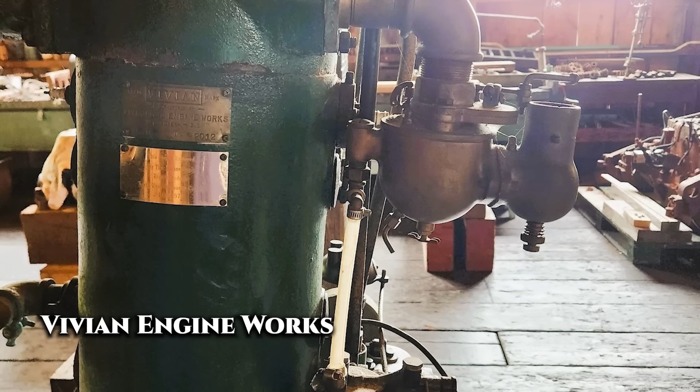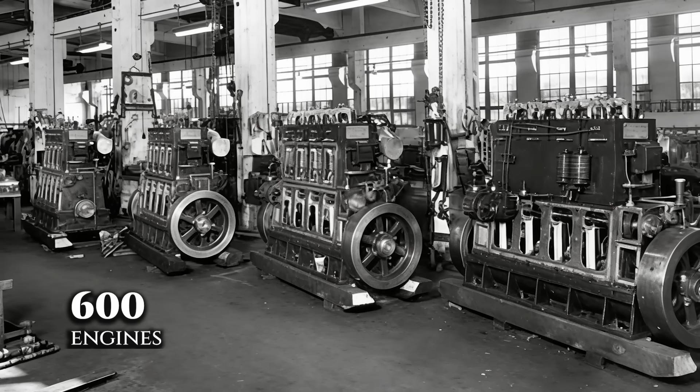Vivian Engine Works built the diesel engines that fishermen and tugboat operators on the BC coast trusted with their lives. Heavy, slow-turning machines cast in a North Vancouver foundry, designed to start in the morning and still be running when the operator's grandchildren took the wheel. Behind that trust was a company that delivered more than 600 engines to the Canadian military during the Second World War and became the dominant diesel builder of the Pacific Coast.

They survived the conversion from sail to power, survived 2 world wars, survived the American imports that pushed north when the tariff walls came down. And then, after 40 years of building in Vancouver, the company simply vanished. The name erased, the records destroyed, the factory gone. But the engines didn't stop. How does a company whose engines are still running 80 years later simply cease to exist?

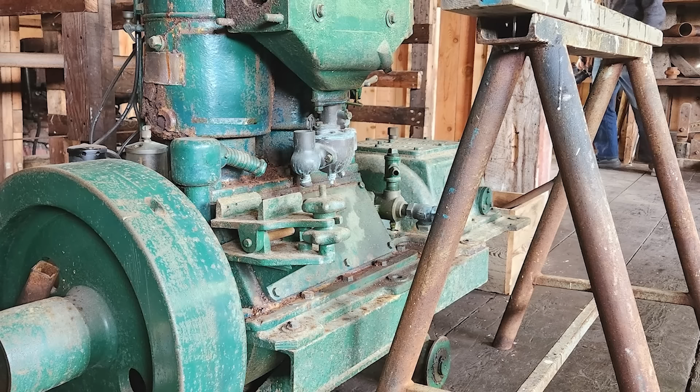What happened? Chapter 1. 60 Clementina Street. Vancouver, in 1890, was a city still rebuilding from its own ashes. 4 years earlier, a land-clearing fire had jumped the line and consumed everything west of Cambie Street in 45 minutes, the entire town, gone before the afternoon was out. What rose in its place was raw and restless.

Roughly 13,000 people crowded onto a narrow spit of land between Burrard Inlet and False Creek, hemmed in by timber so thick you could walk 50 miles north without seeing sky. Sawmills lined the inlet shore, their blades screaming through Douglas fir logs that had taken 3 centuries to grow and 20 minutes to fall. Steam tugs hauled log booms through water brown with bark and sawdust.

To the south, the salmon canneries of Steveston were pulling millions of fish a year out of the Fraser River, packing them into tins stamped with names like Sockeye and Imperial, and shipping them to tables in London and Toronto. This was not a refined city. It was an industrial frontier dressed in rain, and every wheel in it turned on imported iron.

Will Vivian was born into this place on the 14th of May, 1890. His city was young enough to remember its own creation. British Columbia had joined Confederation only 19 years earlier, on the promise of a transcontinental railway that didn't arrive until 1886, the same year the fire took the town. But Vancouver was growing at a pace that startled even the boosters. Between the Great Fire and Vivian's first birthday, the population had climbed from barely 1,000 to roughly 14,000. People pouring in by rail and by steamer, drawn by the lumber trade and the promise of a Pacific gateway.

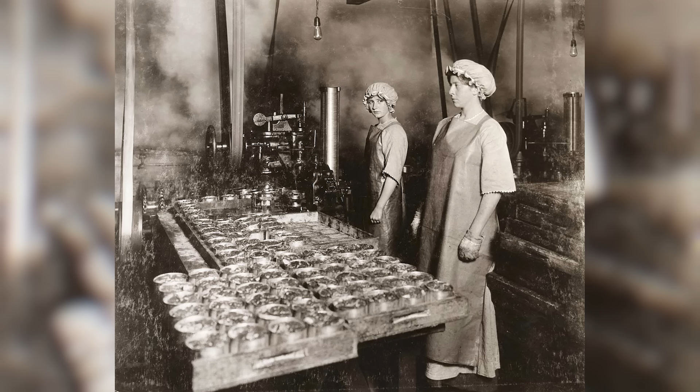The gillnet boats of the Fraser and the Skeena were still powered by sail and oar when Vivian was a boy. Japanese-Canadian fishermen, Norwegians, Croatians, First Nations families who'd worked these waters for thousands of years. They hauled their catches by muscle and wind, the same way their fathers had. The canneries didn't care how the fish arrived, only that it arrived fresh.

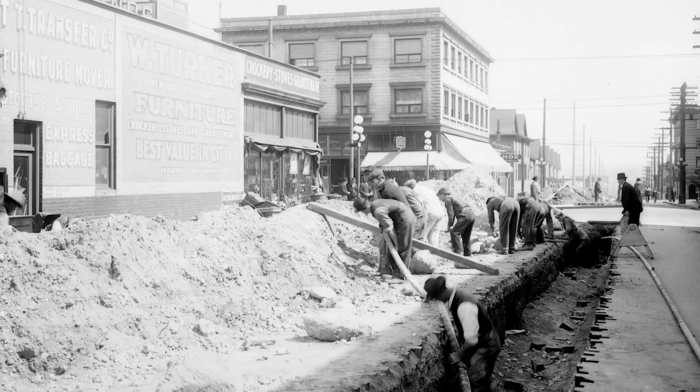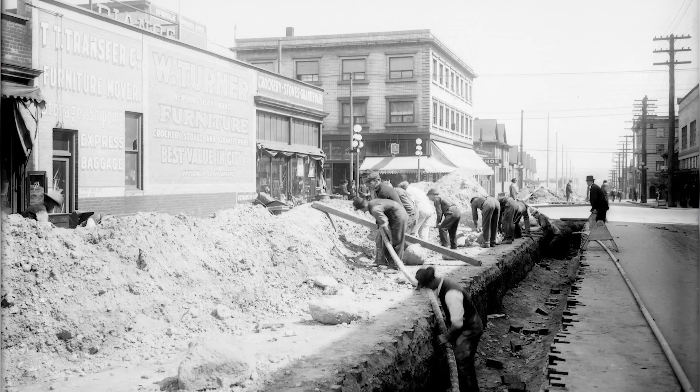But down the American coast, in the machine shops of San Francisco and Oakland, something was shifting. Small, rugged gasoline engines, 1-cylinder, 4-cycle, slow-turning, were being built that could push a 20-foot fishing boat against the current without a crew breaking their backs at the oars. The internal combustion engine was coming to the Pacific, and the men who could build them would own the coast. Vivian went looking for that knowledge.

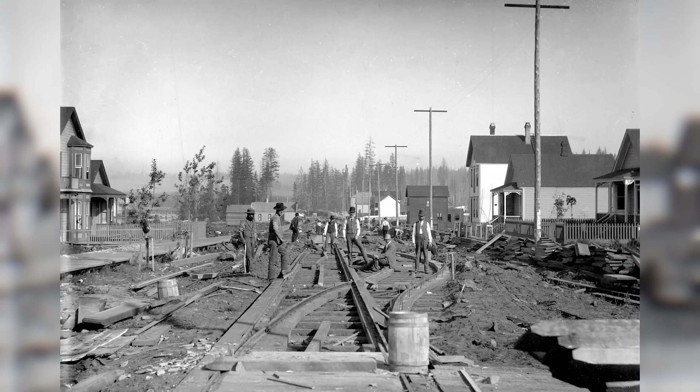As a teenager, he left Vancouver and headed south to San Francisco, to the Imperial Gas Engine Company at 60 Clementina Street, a low brick building in the industrial block south of Market Street, one of the key workshops in the West Coast's emerging engine trade. San Francisco in those years was the machine shop capital of the Pacific, the place where mining equipment, marine engines, and agricultural machinery were designed, cast, and shipped to every port from Puget Sound to Valparaiso.

A young man with steady hands could walk from shop to shop along the numbered streets south of the slot and learn a different discipline in each one: foundry work, pattern making, machining, assembly. At Imperial, Vivian learned the American School of Engine Building from the castings up. Heavy, slow, reliable. 4-cycle, long-stroke, thick-walled cylinders designed to run for years without complaint.

The philosophy was brutally simple. An engine that lasted decades beat an engine that turned fast. Speed was for racing boats and show-offs. The Pacific was no place for either.

Vivian absorbed this conviction the way you absorb a religion in your youth, completely, permanently, and with a certainty that no subsequent evidence would shake. He had no way of knowing, working at his lathe on Clementina Street, that Imperial Gas Engine Co. would one day merge and evolve into Atlas Imperial Diesel Engine Co., the very firm that would become his chief competitor on the Pacific Coast. The master's shop would produce its own rival.

In 1909, 19 years old and back in Vancouver, he founded the Vivian Engine Works. He started where every Pacific Coast engine builder started, with small 1- and 2-cylinder gasoline engines for fish boats, the one-lungers, that were transforming the gillnet fleet from sail to power, one boat at a time. The market was simple and immediate. A fisherman would walk into the shop with cash from the previous season's catch, describe his boat and his waters, and walk out with a delivery date.

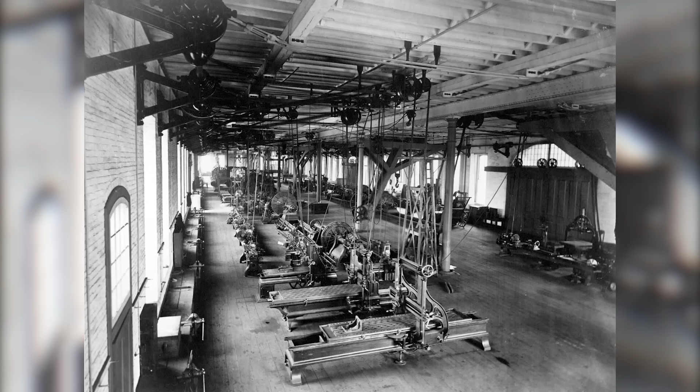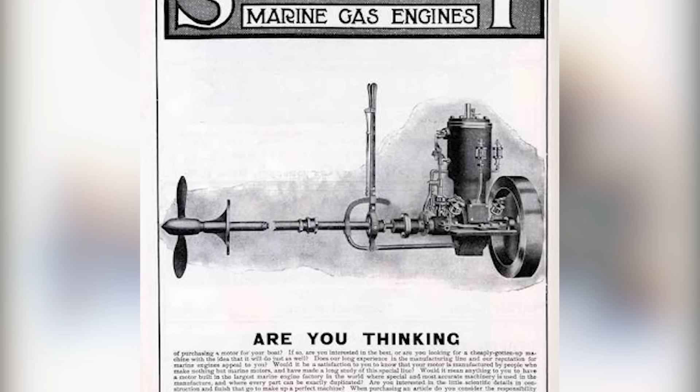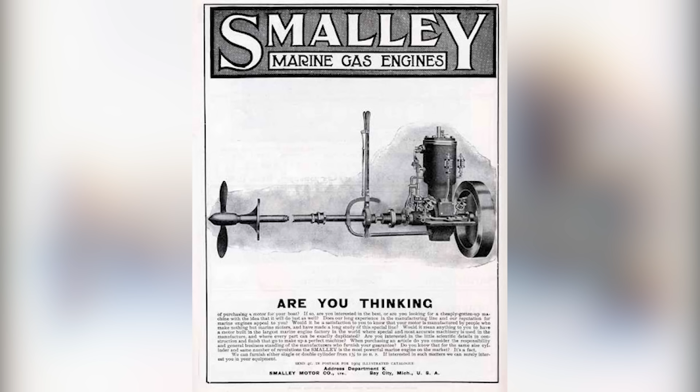What gave him his foothold wasn't genius alone. It was geography. The Rocky Mountains cut British Columbia off from eastern Canadian engine makers as completely as an ocean. American engines faced a steep tariff wall that had been raised again after 1907. A tugboat skipper on the BC coast whose engine failed couldn't telephone Hamilton or Detroit and expect a replacement before the season ended. He needed someone local, someone who cast the block in Vancouver, machined it in Vancouver, and could fix it in Vancouver when the salt water and the hours finally wore something down.

The continent didn't offer Vivian a choice. It offered him a captive market, if he had the skill to fill it. He did. And the company he built from that skill: one man, one shop, one conviction about how an engine should be made, would grow into something that powered an entire coast.

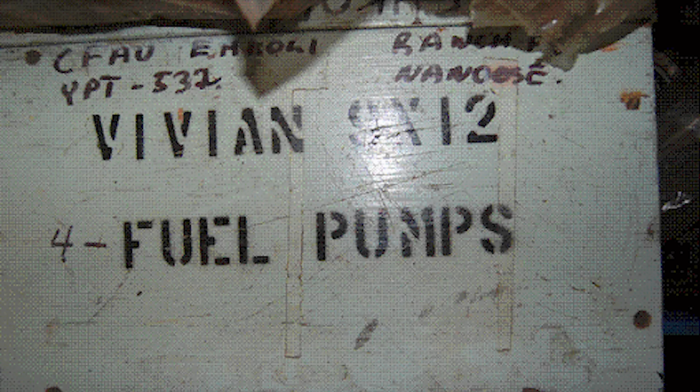Chapter 2. The First Canadian Diesel. Through the 1910s, Vivian's shop grew with the fleet it served. Every season brought more orders as the last sailing gillnetters converted to power, and the tugboat operators on Burrard Inlet discovered that a Vivian one-lunger could haul a log boom through a cross-current that would have stalled a lighter machine.

The customers weren't gentlemen yachtsmen. They were Japanese-Canadian families running seiners out of Steveston, where the smell of salmon and salt hung in the air from April to October. Norwegian trollers who'd come to the BC coast because the fishing reminded them of home: cold water, big timber, long days. Croatian gillnetters on the Skeena who worked in crews and shared the season's take. First Nations fishermen whose relationship with the salmon predated European settlement by millennia. These were the people who kept Vivian's shop running. Men who judged an engine not by its catalog specifications, but by whether it brought them home. They didn't want sophistication. They wanted iron they could trust.

But gasoline had a problem that every wooden-hulled operator understood in his bones. Gasoline vapor is heavier than air. It sinks. It pools in the bilge of a fishing boat like an invisible lake, and one spark, from a loose wire, a backfiring cylinder, a dropped wrench striking steel, turns a wooden hull into a funeral pyre in the middle of the strait. The Pacific Coast's fishing fleet was built almost entirely of wood, and gasoline killed boats and crews with a regularity that doesn't appear in most histories, because the losses were too small, too scattered, and too ordinary to make the papers. A fisherman lost off Haida Gwaii, a tugboat gone in Johnstone Strait. The sea took them, and the newspapers didn't notice.

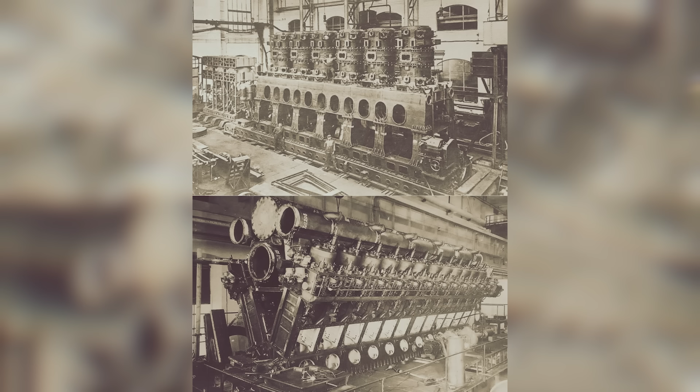And diesel engines, properly built, could run at a lower RPM for longer hours with less wear, which meant fewer breakdowns in open water, fewer seasons lost to repairs, fewer widows made by machinery that failed at the wrong moment. The diesel engine had been proving itself in European marine service since the early 1900s, but on the Pacific coast, it remained exotic, oversized, and foreign.

Eastern Canadian manufacturers hadn't built one small enough for a coastal workboat. American builders were only beginning to experiment with marine applications. The field was wide open. In the 1920s, Vivian stepped into it. He became, by the authoritative account of the Encyclopedia of British Columbia, the first Canadian company to build a marine diesel engine. It was the defining act of his career, the pivot from a competent local gas engine shop to something genuinely pioneering.

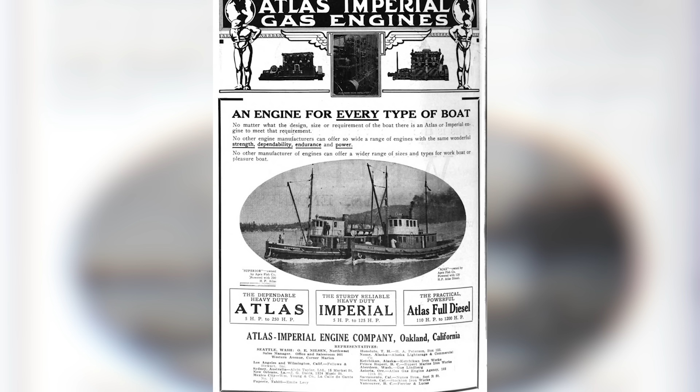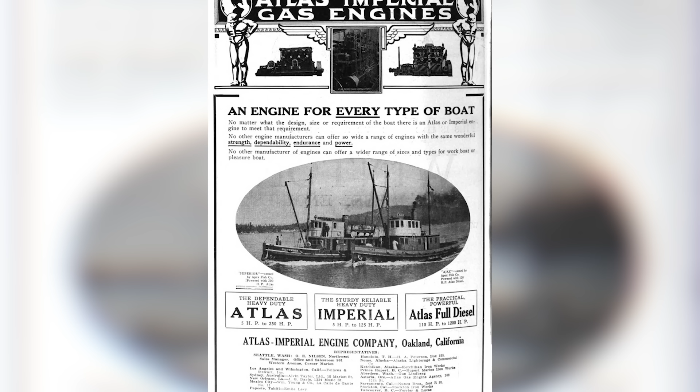And the engine he designed carried every conviction he'd formed at 60 Clementina Street and refined on the water over 15 years of building for the BC fleet. 4-cycle, slow-turning, long-stroke, with a fully enclosed crankcase from the outset. That last detail separated Vivian from his nearest competitor in a way that the operators noticed immediately. The Atlas Imperial diesels coming up from California, built, as it happened, by the successor company to the very Imperial Gas Engine Co., where Vivian had trained as a teenager on Clementina Street, ran with open crankcases.

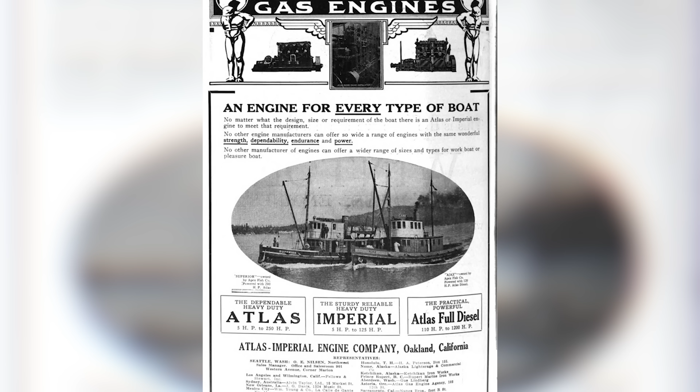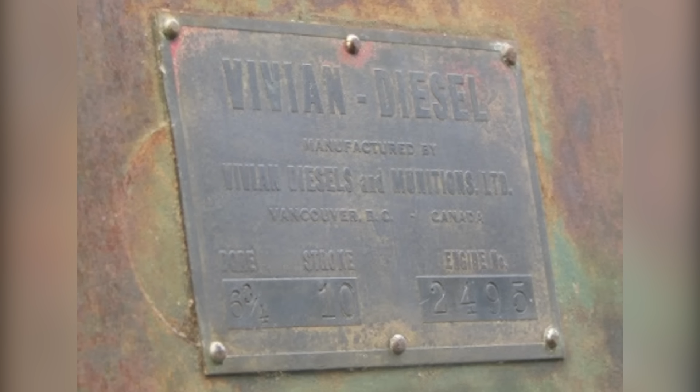It was an irony that Vivian must have appreciated. His own school, the place that had taught him to build heavy, had produced a competitor whose design he considered fundamentally flawed. Open crankcases meant oil mist hanging in the engine room, dirt grinding into the bearings, and constant maintenance in the wet, salt-heavy conditions of the BC coast. Vivian enclosed his. He built heavy castings with thick walls. He kept the RPM low and the displacement large. The result was an engine that turned slowly, burned fuel with a parsimony that operators talked about for decades, and simply would not stop running.

The market was enormous, and it was growing every season. Burrard Inlet's tugboat fleet expanded as the coastal logging industry pushed north, from Howe Sound to Knight Inlet, up the Inside Passage toward Haida Gwaii, into waters so remote that a breakdown meant days of waiting for a tow that might not come. The BC Forest Service was building a patrol fleet to police the coast's timber wealth, boats that ran hard and ran far and couldn't afford engine trouble in a gale off Cape Scott. Small coastal freighters connected communities that had no road access and wouldn't see a highway for a generation or more.

And the fishing fleet, Japanese-Canadian seiners, Norwegian trollers, the gillnet boats of the Fraser and the Skeena, was reaching farther every season, chasing salmon runs that took them hundreds of miles from home port into waters where the nearest mechanic was your own two hands. Every one of those vessels needed an engine that could run all day, burn cheap fuel, take salt water in its stride, and survive the Pacific without complaining about it. Vivian's diesel became the standard answer.

The product line expanded from those early one-lungers into a range that would eventually run from small 3-cylinder marines up to a 10-cylinder, 9-inch bore by 12-inch stroke behemoth, rated at 500 horsepower. An engine so large it was used not for boats, but for generator sets powering mining camps and remote settlements that would never see a hydro line.

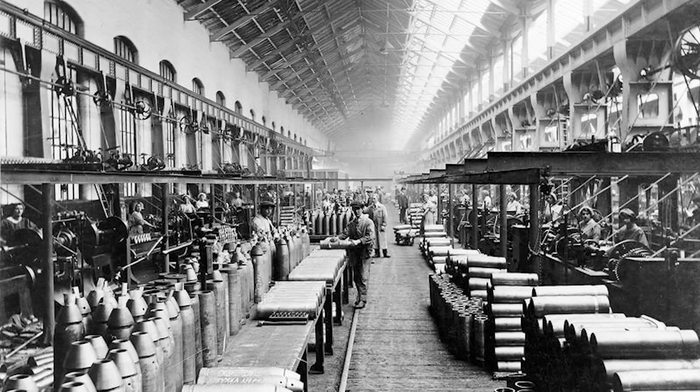Chapter 3. Diesels and Munitions. By the late 1930s, the company had outgrown its original Vancouver shop. A second plant opened in North Vancouver, larger, better equipped, built on the waterfront where finished engines could be craned directly into the hulls waiting below. Young machinists like Frank Outram, who'd already put in time at Boeing's Sea Island facility and the Vancouver shipyard, found their way to Vivian's floor, drawn by steady work and a company that hadn't laid anyone off in a decade.

The smell of that shop would have been familiar to any machinist on the Pacific coast. Hot oil, iron filings, the sharp bite of cutting fluid on steel. But the scale was new. The Vivian Works in North Vancouver wasn't a backyard engine shop anymore. It was a factory, and the engines coming off its floor were going into vessels that worked every navigable mile of the BC coast.

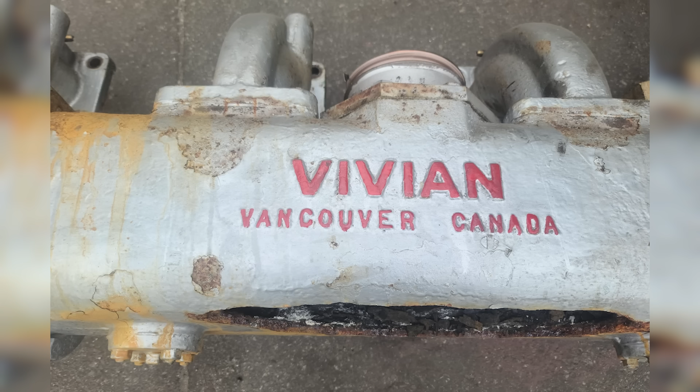The product range told the story of the company's ambition. Marine engines ran to 8 cylinders, 320 horsepower naturally aspirated, 400 with a supercharger. Generator sets climbed higher still, to that flagship 10-cylinder unit that could electrify a mining camp or power a gold dredge in the Yukon. The bore and stroke numbers were stamped onto bronze builder's plates that were bolted to each engine block like a signature.

9-12. Vivian Diesel, Vivian Diesels and Munitions Ltd., Vancouver, BC, Canada.

Those plates were cast to last as long as the engines themselves. Decades later, long after the company that made them had ceased to exist, they'd surface in maritime antique dealers as far away as Maine. Small bronze rectangles that nobody under 60 could place, testifying to a firm that most Canadians had never heard of. When the war came, Vivian was ready.

The company adopted a dual identity that appeared on everything from letterhead to the annual company picnic photograph. Vivian Engine Works Ltd. for the commercial side, Vivian Diesels and Munitions Ltd. for the military contracts. The distinction mattered. It meant the plant was now producing not only engines, but munitions, though the specific ordnance has never been documented in public records. What has been documented, in David Kahn's authoritative account, is the engine output.

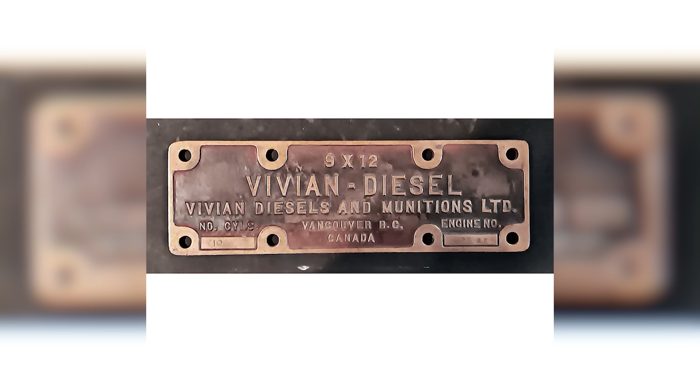More than 600 engines for the Canadian military during the Second World War. 600 engines from a single West Coast plant. Consider what that number meant in the context of a factory that had started, 30 years earlier, as one man casting one-lungers in a Vancouver shop.

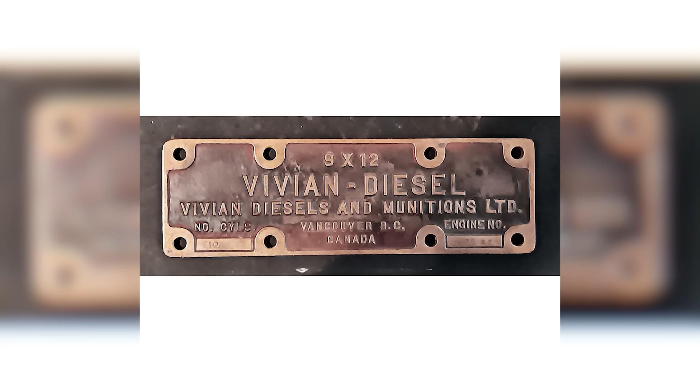A Vivian Marine Diesel was not an assembly line product stamped out in minutes. It was a multi-ton assembly of cast iron, machined steel, and precision-fitted components. The block poured in the foundry, the cylinders bored on heavy lathes, the crankshaft ground to tolerances measured in thousandths of an inch, each bearing surface hand-scraped by machinists who could feel a high spot through their fingertips.

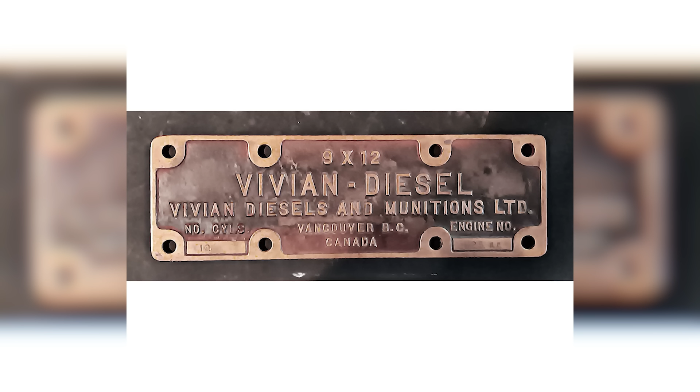Every engine was built to naval specification, inspected and certified before it shipped east by rail to the builders' yards in Ontario. The tonnage of iron that left the North Vancouver waterfront between 1939 and 1945 was staggering. 600 engines, each weighing several tons, crated and loaded onto flat cars bound for Owen Sound and Kingston. And every one of those engines carried the same DNA that Vivian had brought back from San Francisco as a teenager. Heavy, slow, enclosed, designed to run until the hull around it rotted away.

The signature wartime contract was the Royal Canadian Navy's Glen-class tugboat program. These were steel-hulled tugs designed for harbor duty, convoy escort towing, and the heavy salvage work that a wartime Navy generates in punishing volume, pulling damaged vessels off sandbars, towing crippled freighters into port, clearing harbor debris after U-boat attacks on convoy anchorages.

The Glen program split into 2 designs. The shorthouse variant received American engines, 6-cylinder units from Enterprise Engine and Foundry, built in San Francisco. The longhouse variant, the larger, heavier design, the one that would handle the roughest work, received Vivians. 8-cylinder diesels, 320 horsepower, Canadian-built for Canadian hulls.

11 longhouse Glens came out of Russell Brothers Shipyard in Owen Sound, Ontario. The Glenada, the Glendower, the Glenora, the Glenmont, the Glenlea, and 6 more whose names would scatter across Canadian naval history like seeds. Another 5 were built by Canadian Dredge and Dock in Kingston. Every single one of them carried a Vivian at its heart. 8 cylinders of Vancouver iron, turning at the slow, heavy cadence that Vivian had spent 3 decades perfecting.

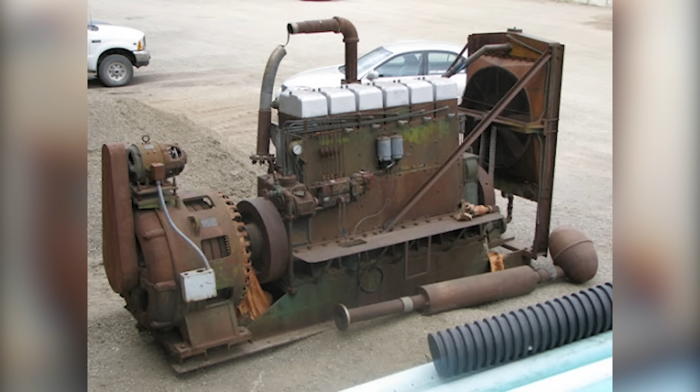Mining camps across the BC interior ran on Vivian power. Remote coastal settlements that would never see a hydro line depended on Vivian generators for their lights, their radios, their link to the outside world. The wartime engine contracts were the headline, but the generator business told an equally revealing story. Vivian iron was woven into the infrastructure of the Canadian North in ways that no other Pacific Coast manufacturer could match.

The company's ambition showed in civilian ventures, too. In 1939, just before the war shut down everything that wasn't military, Will Vivian had commissioned George Askew, a boat builder working out of Marpole on the Fraser River's North Arm, to construct a personal demonstrator vessel. The boat was large enough and seaworthy enough to carry an 8-ton Vivian diesel across the Pacific to Australia on a promotional voyage that would announce Vivian engines to the world beyond British Columbia. He named her the Leola Vivian.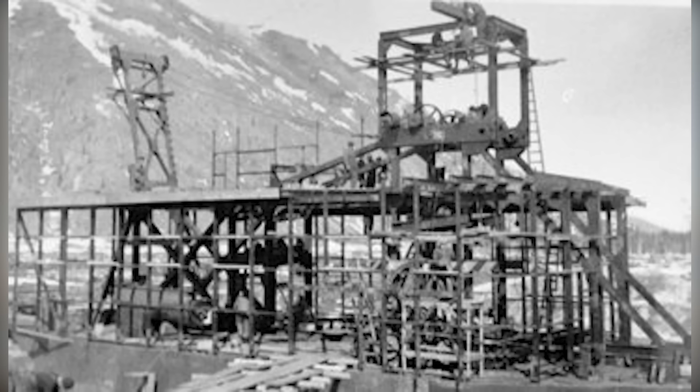The Australian voyage never happened. The war redirected every shipyard and every diesel engine on the coast to military service, but the boat survived. Renamed the Oliver Clark II, she spent the next 8 decades working the BC coast, passing through different owners and different names. Her Vivian eventually replaced by a newer engine, but her hull still sound. In 2013, at 74 years old, she was still afloat. At 86, she still is.

At the PNE, Vancouver's Pacific National Exhibition, the city's annual fair, Vivian diesels took exhibition space on the trade floor, displaying engines with the quiet confidence of a company that knew it had no equal on the coast. Steffens Colmer Studios photographed the booth. The image survives in the City of Vancouver archives, a record of a moment when the company's name meant something that didn't need explaining to anyone who worked the water.

And then the war ended. 600 engines shipped, 16 Glen-class tugs running on Vivian power, a product line that stretched from 3-cylinder fishboat engines to 500 horsepower industrial generators. A workforce that had proven it could deliver military quality at military pace from a single plant on the North Vancouver waterfront. Will Vivian, now in his mid-50s, stood at the head of something remarkable. A company built from nothing by a Vancouver-born machinist, trained in San Francisco, who'd returned home and powered an entire coast.

The annual company picnics, captured in a 1944 photograph now held in the City of Vancouver archives, showed a workforce large enough to fill a park. Men and women, machinists and office staff, gathered under both company names, as if the peacetime and wartime identities were simply two faces of the same conviction.

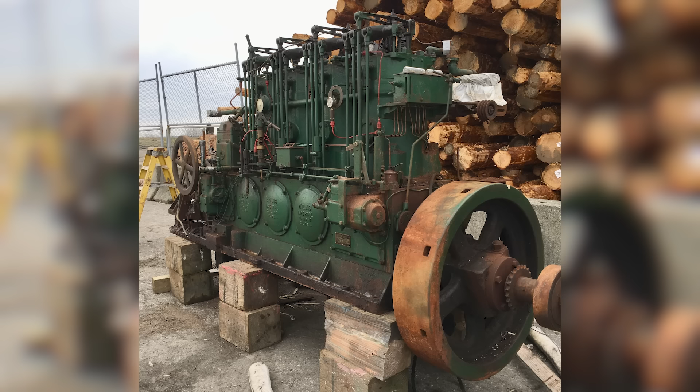Chapter 4. The Summit. Before the cliff. By 1948, Will Vivian was 58 years old, and the man and the company were almost indistinguishable. His engineering convictions hadn't softened with age. If anything, they'd calcified into something closer to doctrine. David Kahn's assessment, drawn from interviews with people who'd known Vivian and worked alongside him, is measured but unmistakable. Vivian resisted the move to light and compact diesel engines, which were easier to install and service, and were produced using mass production methods and more modern metals technology.

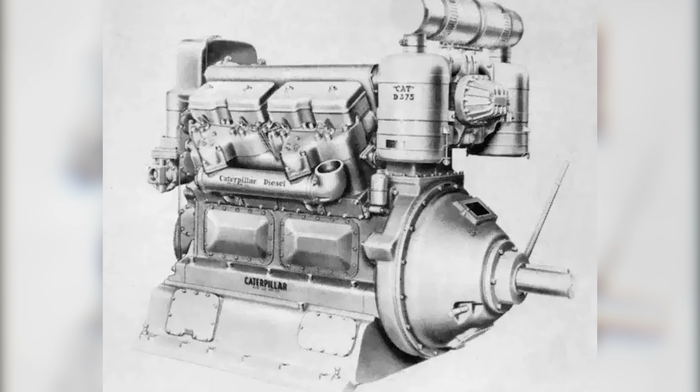He'd refused, on principle, to build locomotive engines when the opportunity was offered to him, a market that could have diversified the company and cushioned it against any downturn in the marine trade. He wasn't interested. He built marine diesels. He built them heavy. He built them to last. He'd been right about that for 40 years. He intended to go on being right. The problem was that the rest of the diesel world had stopped agreeing with him.

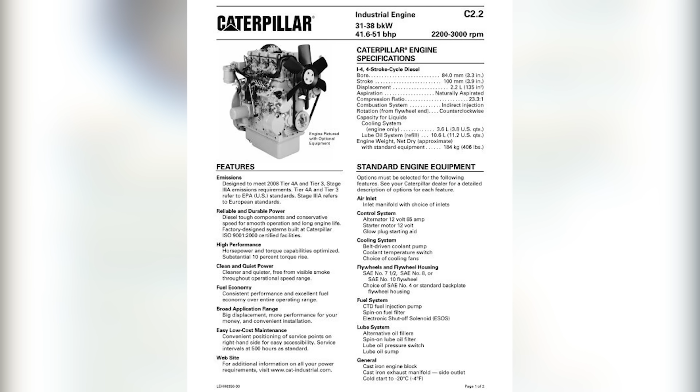Caterpillar, Detroit Diesel, Cummins. The American giants were pouring wartime engineering advances into high-speed, lightweight engines that could deliver comparable horsepower from a fraction of the weight and volume. Better metallurgy, tighter tolerances, higher RPMs, made reliable by alloys and manufacturing techniques that hadn't existed when Vivian learned his trade at 60 Clementina Street. A Caterpillar marine diesel could be installed in half the time, serviced by a dealer network that stretched from Seattle to Juneau, and replaced without rebuilding the engine room around it.

It couldn't match a Vivian for raw longevity or fuel economy, not even close, as the decades ahead would prove beyond any argument. But it was lighter, cheaper to purchase, and available now. For the operators who ran a single boat and counted every dollar against the next season's catch, that calculation was beginning to shift. A Vivian 8-cylinder weighed tons more than a Caterpillar of comparable horsepower. Tons that displaced fuel capacity.

Tons that ate into a hull's carrying ability. Tons that meant a heavier, deeper, more expensive boat to begin with. For the tugboat companies watching their competitors refit with lighter American iron, the pressure was commercial and immediate.

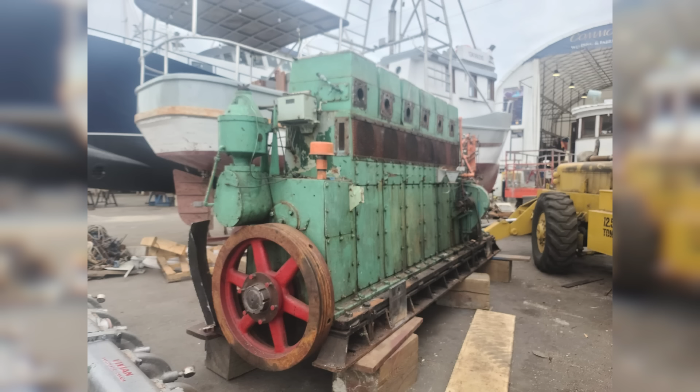And for Will Vivian, standing in his North Vancouver plant surrounded by engines that would still be running on the BC coast 80 years later, the tide was turning in a direction his engineering philosophy couldn't follow, and his temperament wouldn't accommodate. He was right about the engines. History would settle that question beyond any dispute.

Vivian diesels are still turning on the BC coast today, 8 decades on, long after the Caterpillars and Detroits that replaced them have been scrapped, recycled, and forgotten. But being right about the engines and being right about the market are two different kinds of right, and the second is the one that keeps a company alive.

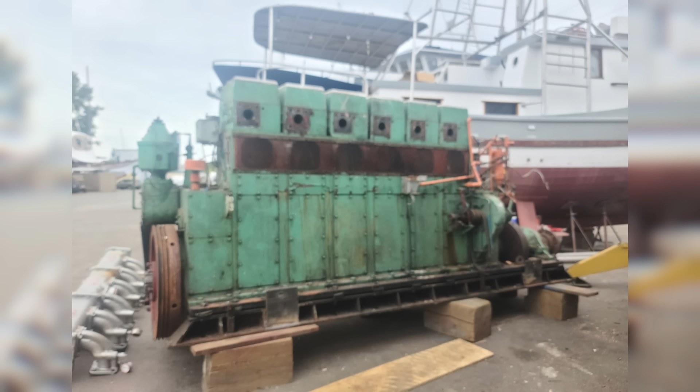In 1949, Will Vivian, 59 years old, the dominant engine builder on the Canadian Pacific Coast, a man whose conviction in heavy iron had never once been proven wrong, made the decision that would determine not just his company's future, but the fate of everything he'd ever built. He sold. Chapter 5. The Men from Loughborough.

Will Vivian sold his interest in the company in 1949. He was 59 years old. He'd built the first Canadian marine diesel engine, powered the BC coast for 3 decades, delivered 600 engines to the Canadian military, and earned a reputation among Pacific Coast operators that no amount of advertising could have purchased.

The man whom David Kahn called the Henry Ford of the Canadian diesel industry signed his life's work over to a group of men from the English Midlands who had never set foot on a tugboat in Johnstone Strait and whose understanding of the Pacific Coast diesel market could have fit on the back of a builder's plate.

The buyer was the Brush ABOE Group, based in Loughborough, Leicestershire, an industrial combine assembled over the previous decade by a man named Alan Paul Good. Good had served as deputy chairman of Brush Electrical Engineering from 1939 and managing director from 1941, and he'd spent the post-war years building something that looked, on paper, like a rational solution to the fragmented state of the British diesel industry. Through the late 1940s, he'd been buying engine companies with the systematic thoroughness of a man following a plan.

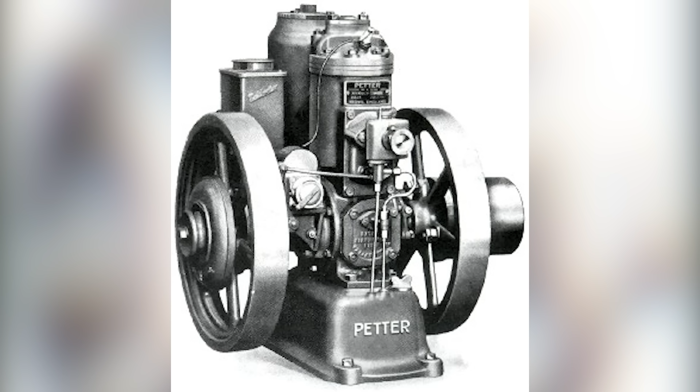Petter of Staines, acquired in 1937 before the war. Mirrlees, Bickerton and Day of Stockport, acquired in 1948. J. and H. McLaren of Leeds, the same year. Henry Meadows of Wolverhampton, alongside them. The ABOE in the group name stood for Associated British Oil Engines.

It was a roll-up strategy. Consolidate every significant British diesel builder under one roof, then rationalize production across the portfolio. Large engines to Mirrlees at Stockport, medium engines to McLaren at Leeds, small engines to Petter at Staines. Each plant would do one thing, efficiently, without duplicating what the sister plants were already doing. It was rational. It was orderly.

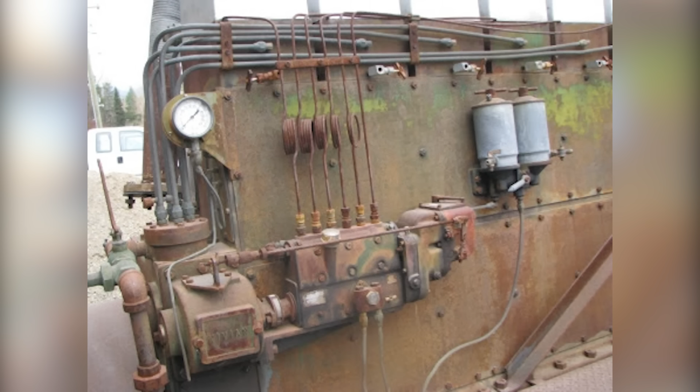And it was entirely British in its assumptions, the assumptions of a small, dense country where factories sat within a few hours' rail of each other, and a single parent company could coordinate production across a handful of Midlands and northern towns as easily as a shopkeeper rearranging goods on adjacent shelves.

Vivian Diesels and Munitions Limited was folded into this structure in 1950, the formal corporate consolidation completing a deal that Will Vivian had agreed to the year before. The same tranche brought in National Gas and Oil Engine Company of Ashton-under-Lyne and Hopkinson Electric Company.

On paper, the Vancouver operation was now part of a British diesel empire that stretched from Loughborough to Leeds, to Stockport, to Staines, to Vancouver. On the water, 4,000 miles from the nearest sister plant, nothing about that sentence made any sense at all.

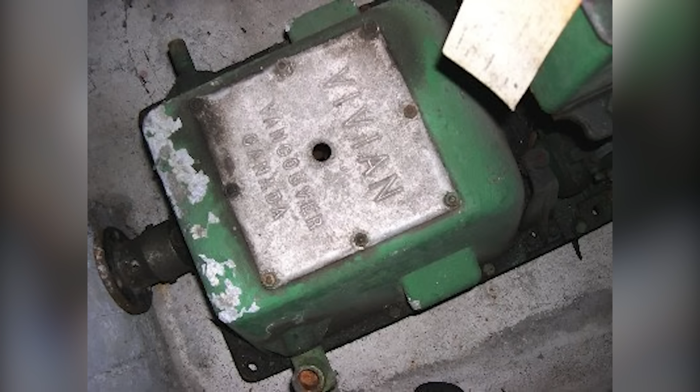The machinists on the North Vancouver floor, men like Frank Outram, who'd chosen Vivian over Boeing and the shipyard because Vivian built things that lasted, woke up one morning to discover that their employer was no longer a Vancouver company, run by a Vancouver man who walked the floor and knew every casting by its number.

Their employer was now a British conglomerate headquartered in the East Midlands, managed by executives who were rationalizing engine factories the way a rail dispatcher reroutes freight, by capacity, by category, by the logic of a system that had been designed for a country that could be crossed in a day.

Why Vivian sold is a question the surviving record can answer only in part, because the records that would have settled it completely were destroyed a quarter-century later.

Kahn's account stresses the competitive pressures that were closing in from every direction. The American high-speed diesels from Caterpillar and Detroit Diesel and Cummins that Vivian had refused to build. The post-war shift toward lighter, mass-produced engines that could be installed and serviced by a wider network of mechanics. The rising cost of maintaining a heavy casting, low-volume, hand-finished production line against companies that could stamp out a marine engine in a fraction of the time and sell it for a fraction of the price.

The tariff wall that had protected BC manufacturers was lower than it had been. The American dealer networks were pushing north. The market that had once been captive, held in place by geography and trade policy, was opening, and the engines coming through that opening were everything Vivian's were not: light, fast, cheap, and disposable. Vivian's own engineering philosophy, the quality that had made his engines supreme, had become the quality that made his company most vulnerable to exactly this kind of pressure.

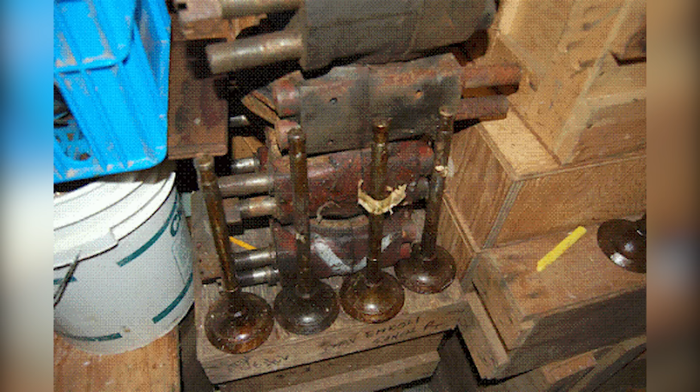He wouldn't build light. He wouldn't build fast. He wouldn't diversify into locomotive engines or industrial applications beyond generator sets. He was a marine diesel man, and he built marine diesels the way he'd been taught at 60 Clementina Street 40 years earlier: heavy and slow and built to last forever. And by 1949, the question wasn't whether the world still needed heavy, slow-turning diesels. The engines themselves would answer that question for the next 8 decades. The question was whether a single independent works in North Vancouver could go on building them while the giants scaled and the conglomerates consolidated. The answer, apparently, was no.

Will Vivian took the British money and stepped away from the company he'd founded at 19. He would live another 16 years, dying in 1965 at 75. Whether he walked away in relief or in defeat, in quiet resignation, or in the private certainty that his engines would outlast whatever the men from Loughborough did to his company, nobody now alive can say. What the record does show is that from the moment the papers were signed, the decisions about what happened on the North Vancouver shop floor were no longer made by someone who knew the coast.

Chapter 6. The Wrong Engines for the Wrong Coast. The logic of the Brush ABOE group was specialization. Each plant would build one class of engine, and the group would cover the full range of the British and Commonwealth diesel market from a coordinated portfolio. Large, slow-speed diesels went to Mirrlees at Stockport. Medium-speed units went to McLaren at Leeds. Small high-speed engines went to Petter at Staines. Every factory had its assigned lane, every product range its designated builder. The overlap and competition that had characterized the pre-war British diesel industry would be eliminated by the rational hand of central planning. In that scheme, the Vancouver works had no obvious manufacturing role.

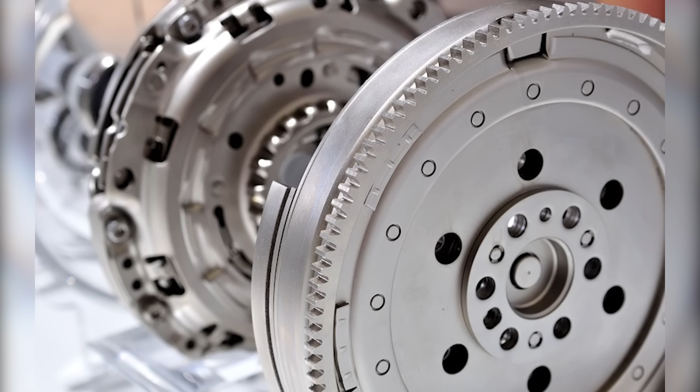The engines Vivian had built for 40 years, heavy, slow-turning, large displacement marines designed for the specific conditions of the Canadian Pacific, didn't map onto any of the categories that Brush was rationalizing around. They weren't the enormous, slow-speed units that Mirrlees built for power stations and large ships. They weren't the compact, high-speed engines in the Petter range. They were something entirely their own. A regional masterpiece, designed by a man who knew his customers' boats by name and his waters by decades of experience, purpose-built for a market that existed nowhere else on Earth and that couldn't be served from Stockport or Staines or anywhere that wasn't within crane reach of Burrard Inlet.

What happened next is where the documented record thins and the analysis sharpens. David Kahn's account, written while Vivian employees were still alive to recall the transition in detail, states plainly that the Vivian brand disappeared in the early 50s. The Brush ABOE plant specialization strategy, documented in the group's own corporate records, left no manufacturing function for a Pacific Coast works that had been building a unique product line with no equivalent in the British portfolio. The inference, supported by the corporate strategy but not yet confirmed by internal correspondence, which was destroyed, is that the Vancouver plant was redirected from building Vivian-designed engines to selling and servicing British-designed engines imported from the Midlands plants.

If that inference is correct, and everything in the record points toward it, the mismatch would have been immediate and devastating. It was not a matter of British engines being poorly built. Petter and Mirrlees and McLaren all made competent machinery for the markets they were designed to serve. The problem was that the market they were designed to serve was not this one. Consider what the BC operators actually needed.

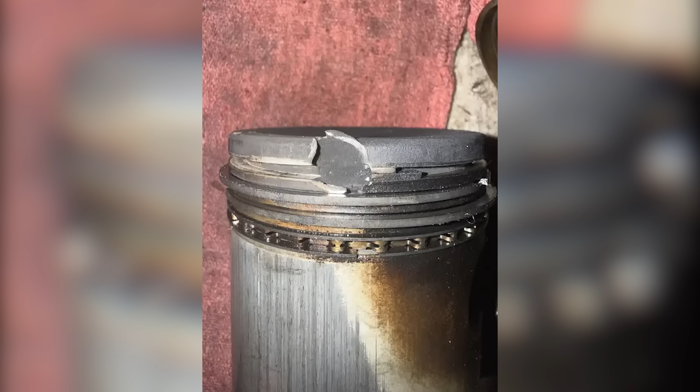Now imagine handing those operators a catalog for a British engine they'd never heard of. A Petter Marine diesel, designed for the relatively sheltered waters of the English Channel or the North Sea, lighter and faster turning than anything they'd run before, built to tolerances that assumed a service depot within a day's sail and a parts supply chain that ran through a Midlands warehouse 4,000 miles and 6 weeks of shipping away.

The operators didn't need to read the specifications to understand the problem. They could feel it. A lighter engine in a heavy sea does not behave the way a Vivian behaved. It doesn't hold the same RPM against the same load. It doesn't absorb the same punishment from a skipper who doesn't have time to baby his machinery when there's a log boom to deliver and a tide to catch.

It doesn't carry the same reserve of iron and inertia that made a Vivian diesel feel, to the man standing above it in a pitching engine room, like the safest thing on the water. The sales decline, once it began, would have been swift and irreversible. These were not customers who could be educated or marketed into acceptance.

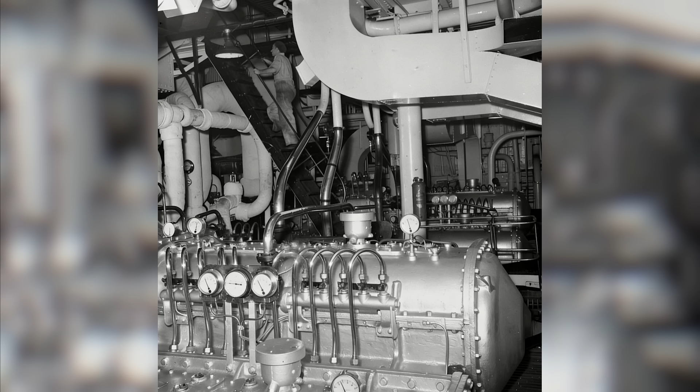A tugboat operator who'd run a Vivian for 20 years, who could diagnose a cylinder problem by ear and service the injectors on his own deck with a wrench and a coffee can for the overflow, wasn't going to switch to an unknown British import when a Caterpillar dealer sat right there in Vancouver with an engine he could inspect, a parts catalog he could read, and a service network that ran from Seattle to Juneau to Ketchikan.

The Cat wasn't as good as the Vivian. Nothing was. And the decades ahead would prove it beyond any argument. But the Cat was North American. The Cat was available next week, not next season. And the Cat didn't require a skipper to trust a company in Loughborough, England, that had just killed the only Canadian engine he'd ever wanted to run.

Alan Paul Good, the architect of the consolidation that had produced this outcome, didn't live to see the full consequences of his strategy's failure on the Pacific coast. He died in February 1953 in South Africa, after a long illness, at 54 years old.

Good had also served as chairman of Associated British Engineering and of Heenan and Froude, a man who sat at the center of a web of British industrial companies and managed them with the confidence of someone who believed that rational organization could solve any problem of scale or geography.

His death at 54 removed the one executive who might have understood that the Vancouver works demanded exceptional treatment, that a factory 4,000 miles from Loughborough, serving a market with no parallel in Britain, couldn't be managed by the same rationalization logic that worked between Stockport and Staines. Whatever flexibility the system might have had died with him.

Without Good, the Brush Group lost whatever strategic coherence it had possessed, and the Vivian brand, already absent from the Pacific Coast engine market, disappeared entirely.

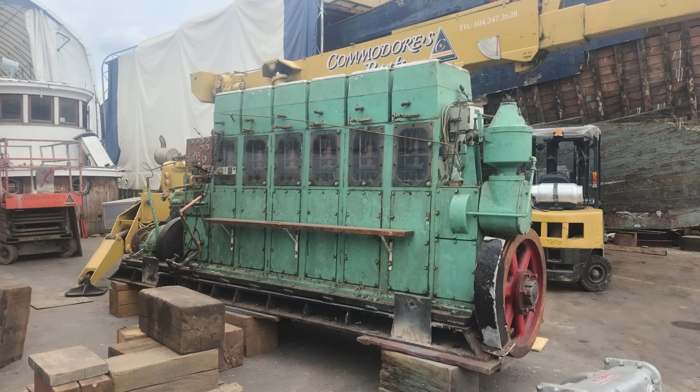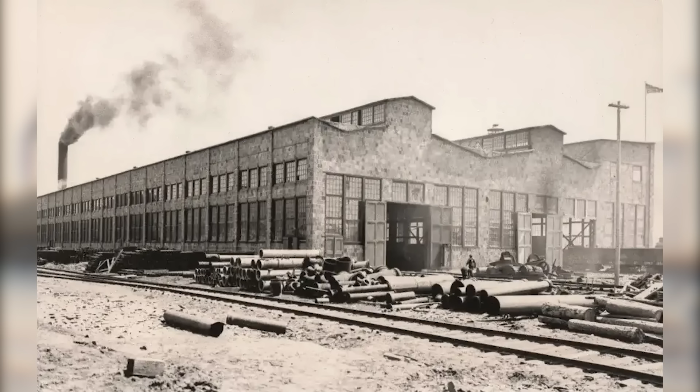Chapter 7. The Vanishing. After Hawker Siddeley absorbed the Brush companies in 1957, the Vivian name entered a corporate labyrinth from which it would never emerge. Hawker Siddeley was enormous. Aircraft, locomotives, electrical equipment, bridge steel, defense contracts spanning 3 continents. And a defunct diesel brand from a small plant in North Vancouver sat nowhere on its list of priorities. The assets, whatever remained of them, passed into the administrative custody of Hawker Siddeley's Canadian operating arm, Canadian Car and Foundry. CC&F had its own history. It had built railway rolling stock and military vehicles from plants in Montreal and Thunder Bay. But it had no connection to the Pacific Coast, no knowledge of marine diesel engineering, no institutional memory of what Vivian had been or what it had built.

And sometime in the 1970s, acting with the bureaucratic efficiency of a company disposing of storage it no longer wanted to pay for, Canadian Car and Foundry destroyed the Vivian records. All of them. The engineering drawings that showed how every Vivian diesel had been designed. The bore specifications, the bearing clearances, the casting dimensions, the metallurgical notes on what alloys Vivian had used, and how he'd heat-treated the critical components. The production logs that recorded every engine built, every serial number assigned, every vessel that carried a Vivian out of the North Vancouver works. The pattern books, and the physical wooden patterns themselves, the molds from which every Vivian casting had been poured.

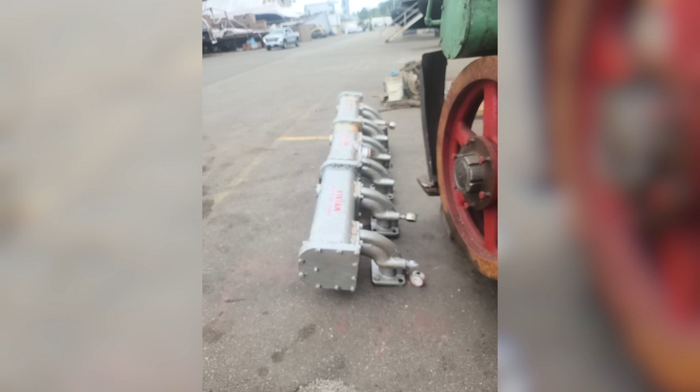Patterns that represented 40 years of iterative refinement, and that were irreplaceable in the most literal sense of the word. Without those patterns, no one could ever manufacture a new Vivian cylinder block, a new crankcase, a new bearing housing. Every Vivian diesel still running on the coast was now running on finite parts. When something wore out or broke, there would be no replacement, only improvisation, adaptation, or silence. The correspondence files, the procurement records, the wartime contracts that would have documented the specific munitions production, and the dollar values of 600 military engines. The personnel records of the machinists who'd built them. Gone. Disposed of as the dead paperwork of a company that no longer existed by people in Thunder Bay who had no idea what the boxes in their storage room contained or what it would mean to the operators still running Vivian iron on the Pacific Coast when the last spare part was used and no more could be made.

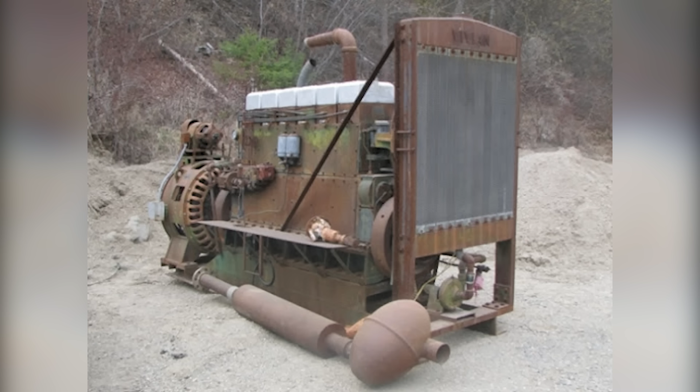Will Vivian's personal papers followed the same path into oblivion. After his death in 1965 at 75, whatever survived of the man's working life, his letters, his technical notes, his records of 40 years spent designing and building marine engines, the correspondence with operators and naval procurement officers and Brush executives that might have explained exactly what happened in the years after the sale, was destroyed. By whom and under what circumstances the surviving record doesn't say. What it says is that the destruction was complete. The man who built the first Canadian marine diesel left behind no archive, no memoir, no personal account of what he'd built or why he'd sold it, or what he thought of what the British did with it afterward. His engines survive. His voice does not.

The result was a documentary blackout so total that it explains everything about why Vivian Engine Works is unknown today. Not just to the general public, but to the industrial historians who should have written its story, to the maritime museums that should have preserved its artifacts, and to the very communities on the BC coast that it served for 40 years.

How does a company that built the first Canadian marine diesel, that powered the Pacific Coast fishing and logging fleets, that delivered 600 engines to the wartime military and put its iron into Royal Canadian Navy tugs and gold dredges and mining camps from the Fraser River Delta to the Yukon interior? How does a company like that simply vanish from public memory?

The answer is not neglect. It is not the slow fade of time. It is a specific act of destruction, committed by a specific successor company in a specific decade, that erased 40 years of industrial history as thoroughly as if the company had never existed.

The only comprehensive account of the company that survives is a single article, David Kahn's Will Vivian, Pioneer Engine Builder, published in Raincoast Chronicles No. 9 by Harbour Publishing in the mid-1970s, written at the last possible moment, while some of the original Vivian employees were still alive to be interviewed. Without Kahn, the company would be entirely lost to public memory. With him, it survives, but as a single magazine article, not as the industrial archive that 40 years of engine building should have produced.

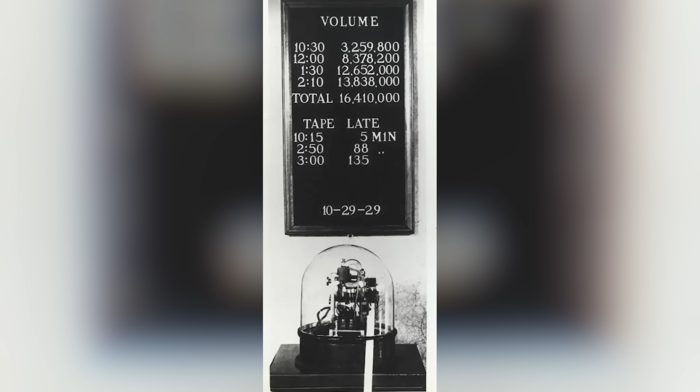And the brand itself, the residual intellectual property, the corporate shell, whatever the Vivian name was worth as a line item on a balance sheet, it kept moving through a chain of transactions that had nothing to do with diesel engines and everything to do with the restless mathematics of corporate finance. Hawker Siddeley's electrical power division was seized in a hostile takeover by BTR in November 1991 for £1.5 billion. BTR sold the same division to the FKI Group in November 1996 for £182 million, less than an eighth of what it had cost 5 years earlier.

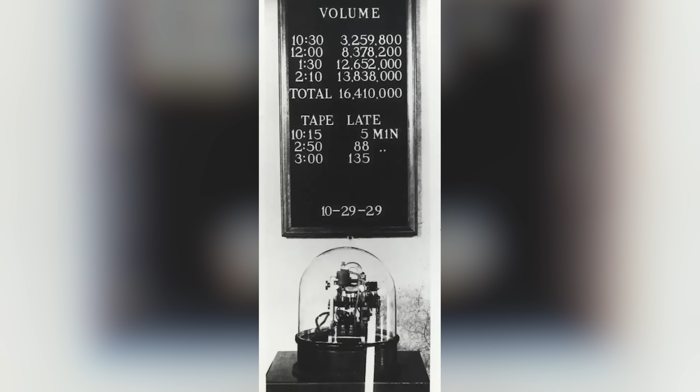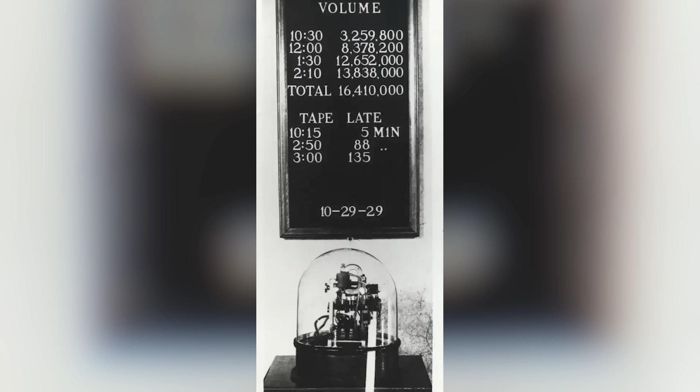FKI was acquired by Melrose on the 1st of July 2008. Melrose sold to One Equity Partners in 2021. One Equity sold to Greenbelt Capital Partners in 2025. 7 owners since Will Vivian signed the papers in 1949. The Vancouver plant vanished at the first transaction. The brand name has been traded 6 times since, by people in boardrooms in London and New York who could not have found North Vancouver on a map and who would not have recognized a Vivian builder's plate if one were sitting on their desk.

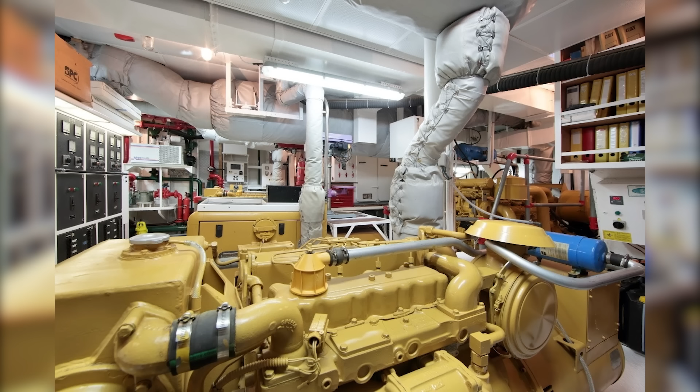Chapter 8. Still running. The company is gone. The records are gone. The patterns, the drawings, the correspondence, the builder who made them. All of it, gone. The engines are not. On the BC coast today, more than 8 decades after they were cast in a North Vancouver foundry, Vivian diesels are still running. Not as museum curiosities behind glass. As working machines, turning in the holds of boats that still fish and still tow and still haul, doing the job they were designed for, in the water they were designed for, at the slow, heavy cadence that Will Vivian set when he poured his first marine diesel casting in the 1920s.

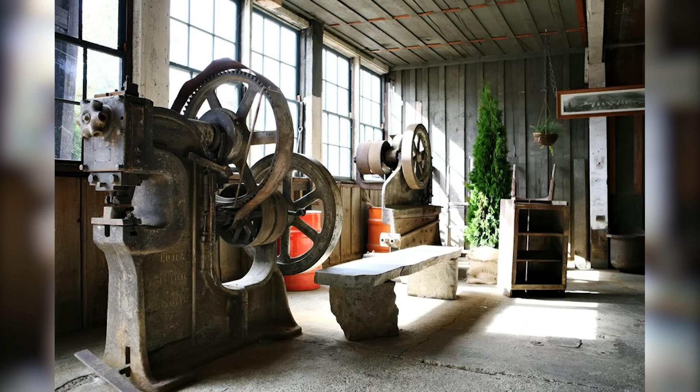The MV Perry is the one still earning her keep. Built in 1941 as a wooden-hulled tugboat, she carries her original Vivian diesel below decks, 85 years old and running. Westwind Tugboat Adventures operates her on the BC coast, and the sound of that engine at idle is something you feel in your chest before you hear it in your ears. A deep, rhythmic thump, one combustion stroke at a time, unhurried and certain, with the bass resonance of heavy iron doing exactly what it was made to do. The engine room smells of hot oil and old iron, and the particular mineral warmth that comes off a machine that has been running longer than most people have been alive.

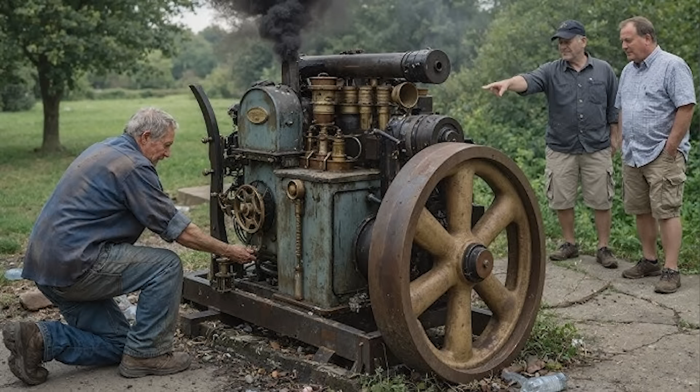At Britannia Beach, north of Vancouver, on the Sea to Sky Highway, the Britannia Mine Museum displays a Vivian diesel on its floor, a National Historic Site preserving not just the mine, but the industrial machinery that served it. Stripped of its hull and open to view, the engine's scale is startling. The block alone is the size of a small car. The flywheel is a disc of cast iron that two men couldn't lift. Standing next to it, a visitor begins to understand why these engines survived when everything around them, the company, the records, the industry, did not. They were built as if their maker believed iron was the only material that could be trusted to carry the truth forward.

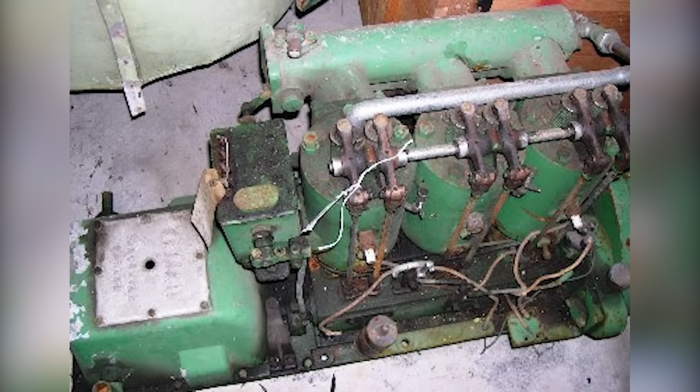In Chilliwack, at the Atchelitz Threshermen's Association, 4 Vivian engines sit in a collection that constitutes the most significant gathering of Vivian iron outside a working vessel. They arrived in 2013, transferred from the Vancouver Maritime Museum by John Black and Frank Vanden Dorpel: a straight-8 marine engine from the Leola Vivian herself, the demonstrator Will Vivian had built for the Australian voyage that the war prevented. A 4-cylinder marine, a 3-cylinder marine, and a rare 60 to 80 horsepower 3-cylinder gasoline engine recovered from a tug that worked out of Port Alberni.

4 engines, 4 decades of engineering, saved from a museum that no longer had room for them by a Threshermen's Association that understood what they were. And then there's the Glenada, one of the original Glen-class tugs built by Russell Brothers in Owen Sound during the war. Vivian powered from the day she was launched. She survived the war, survived decades of hard service, and made it all the way to Thunder Bay, where she sits today.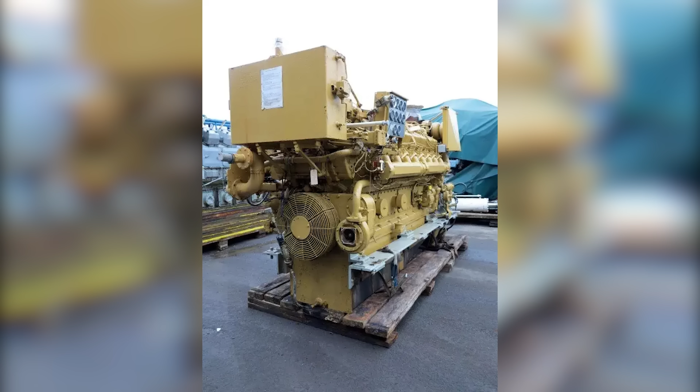But her original Vivian 8-cylinder is gone, destroyed, according to the people who knew her, in a catastrophic mechanical failure. The word they use is blown up. She was re-engined with a Caterpillar D399, and she carries on under American power now. It is the one Vivian survivor story that ends the way the company's story ended. The Canadian iron removed, the replacement installed, and the vessel carrying on under a different heart, as if the original had never existed.

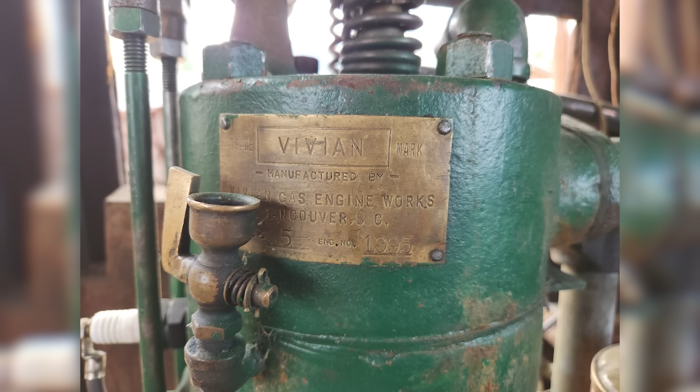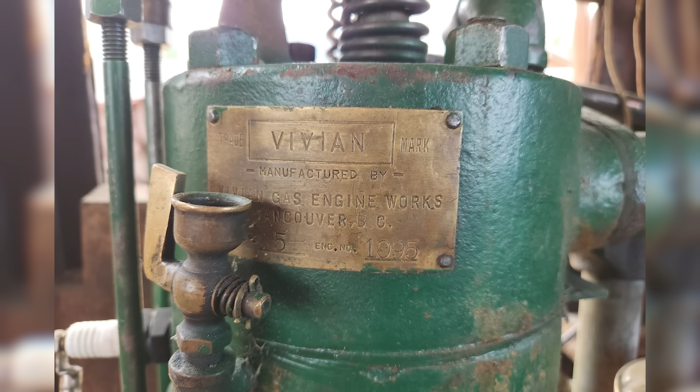The bronze builder's plates outlast everything. Small rectangles of cast bronze stamped with bore and stroke, and company name, Vivian Diesels and Munitions, Ltd., Vancouver, BC, Canada. They surface in maritime antique markets and online auctions from the BC coast to the eastern seaboard. The Skipjack Marine Gallery in Maine has handled them. Private collectors trade them, knowing that the company behind the stamp no longer exists, and that the engineering records that would explain what each plate was bolted to were destroyed by a railway company in Thunder Bay that had never heard the name Vivian, and never would.

Chapter 9. What an engine remembers. A Vivian diesel doesn't know that the company that built it is gone. It doesn't know that the drawings were burned, that the patterns were scrapped, that the brand has been traded through 7 corporate owners without any of them noticing it was there. The engine knows one thing only, the next combustion stroke, and the next, and the one after that. It has been doing this for 80 years, and it will go on doing it for as long as someone feeds it fuel and oil and has the sense to leave it alone.

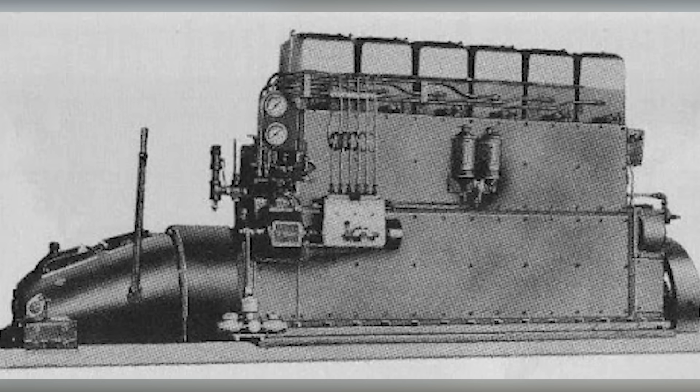Will Vivian built for this, and nothing else. Not for quarterly earnings or shareholder returns, or the rationalization strategies of men in Loughborough who'd never tasted salt spray off a crankcase vent. He built for the fisherman who needed to come home, for the tugboat skipper who couldn't afford a breakdown in a following sea, for the logging camp operator who wanted a generator that would outlast the camp itself. He built heavy because heavy lasted. He built slow because slow endured.

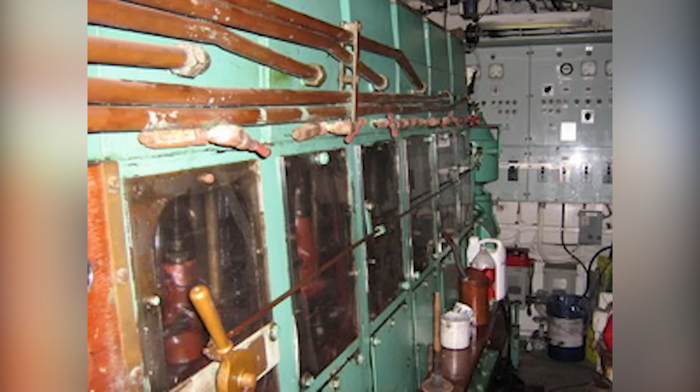He refused to change because he believed, with the stubbornness that was both his greatest strength and the crack through which the British eventually entered, that the things that worked would always be needed, no matter what the market said. The market moved on. The company didn't survive it. The records didn't last the decade after his death. The man who built it all died quietly in Vancouver in 1965, and the papers that documented his life's work were thrown away by people who didn't know what they held and wouldn't have cared if they had.

But the engines, the heavy, slow, overbuilt, deliberately conservative engines that Will Vivian cast in a North Vancouver foundry, because he believed that iron outlasts everything else. The engines are still here, still turning, still proving him right about the one thing that mattered most to him, long after the market and the company and the records and the man himself have gone.

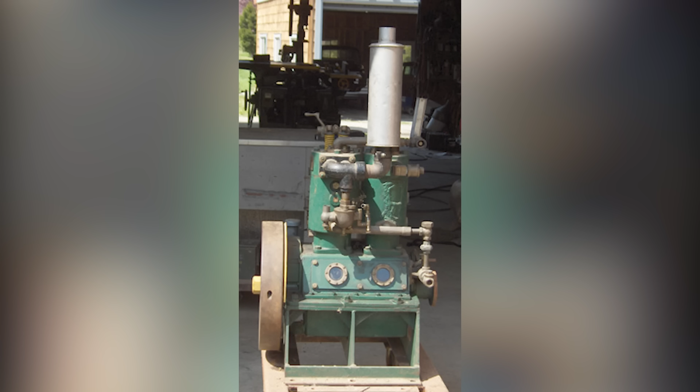The MV Perry heads out in the early morning, her hull cutting the harbor water, her Vivian turning below decks at the same cadence it has held since 1941. The exhaust note carries across the inlet, low, steady, unhurried. And then the boat rounds the point, and the sound fades, and the water closes behind her. And the silence that settles over the harbor is the silence of a coast that has already forgotten the name of the man whose iron is still keeping it running.